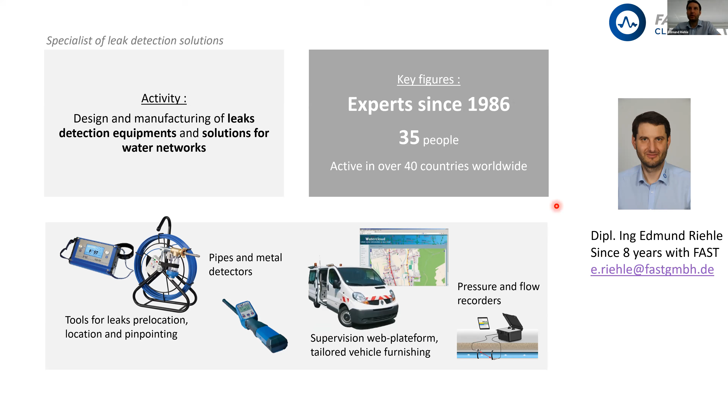We have about 35 people working in our company, and we are active in over 40 countries worldwide. And below here you see some of our tools and products we offer. I will not go into the details here because we want to focus today on tracer gas leak detection.

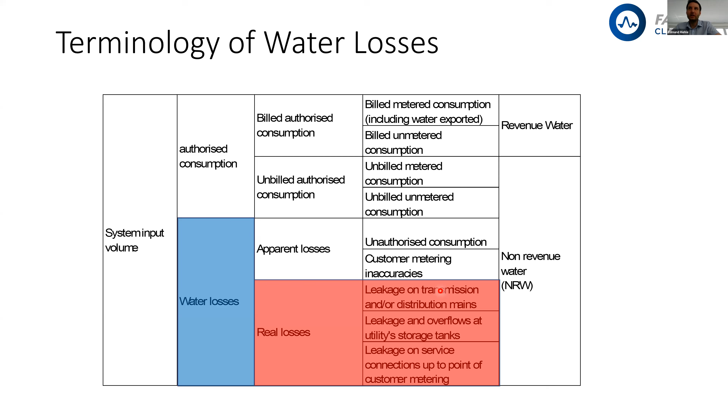Okay, then we also have developed this kind of nice pyramid. We call it the pyramid of success. You see here on the base, you always have some indication that you have a leak in a water network. Then we step up in the pyramid and we do a monitoring of the network through the loud silent noise principle. Then you already know a location or a section of a pipeline which has a leak.

If you don't know where the pipe is, this is usually the next step: before you start pinpointing and really locating the leak, you need to know where the pipe is going. So we can also do pipe and object locating with our solutions. And then we do pre-location, either with noise loggers, like with the loud noise silent principle. We also provide correlators. This is kind of already one of the last steps, but we took it out of the pinpointing mode because it has a very sophisticated background and is a technology which needs special skills as well.

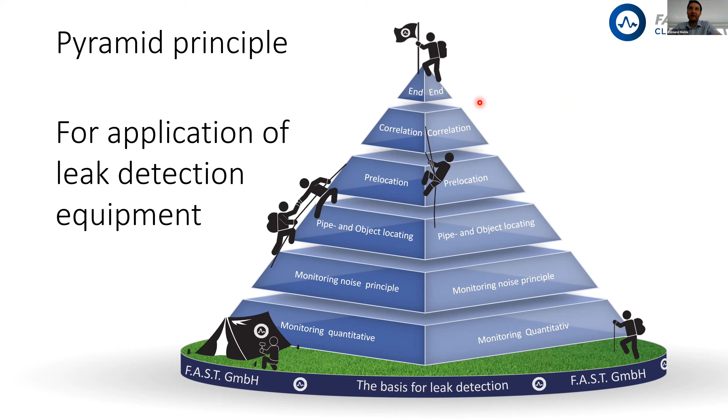For the pipe searching step, we provide PWG for non-metallic pipes, but also metallic pipes. We use a pipe mic for inserting to trace the pipe as well, flexi trace kind of. We do object locating with a metal detector. All this is in the step of pipe searching. For pre-locating, we also do listening sticks, either manually acoustic or electronically amplified. Manual is also acoustic, but the others are all electronically amplified signals, so it's easier for the operator to hear.

For correlators, we provide either stationary ones built inside cars or mobile ones to take out to the field, only hanging around your neck. And for pinpointing, we have solutions with geophones, which is the most common one. Then we also have the pipe mic, which is a unique solution developed by our company and by me actually. And last but not least, as the last resort, we use tracer gas for pinpointing leaks in the water network. And this is my presentation today.

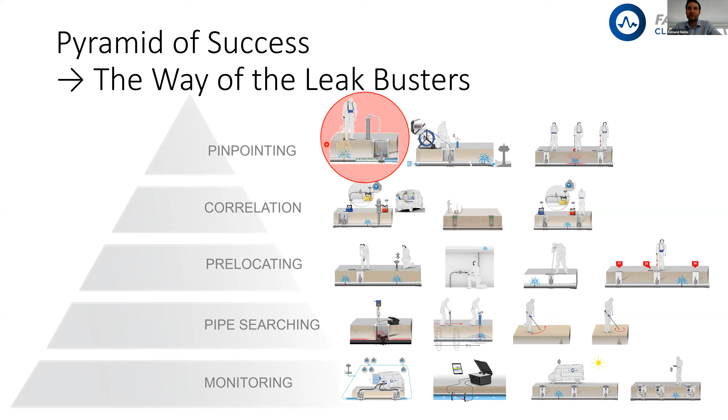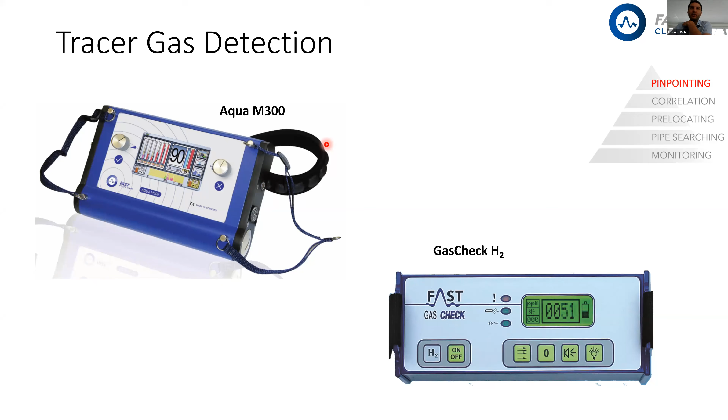I want to show you the application of tracer gas, what you need to be aware of, so the limits and borders of this technology. Okay, for the solutions we have for tracer gas, we use our Aqua M300 or the gas check, which are only hydrogen-sensitive sensors. So we cannot detect helium or other gases. I will explain why we only use hydrogen for tracer gas leak detection later on. Okay, when to use tracer gas, important.

So we say it's a solution of the last resort if all other technologies fail. We have at least some other technology which still can pinpoint your leakage. And one of the main factors is always the ambient noise, especially in large cities where you have 24 hours traffic, pumps running, air conditioners, and so on. So these noises are always louder than the leak sound, and you cannot detect or pinpoint the leak by the acoustic principle. And therefore, tracer gas is here one of the last.

I say one of the last because pipe mic could be also a solution in this situation. But tracer gas was, before the pipe mic was developed, the last resort for very noisy environments to pinpoint, not detect, but pinpoint the leakage.

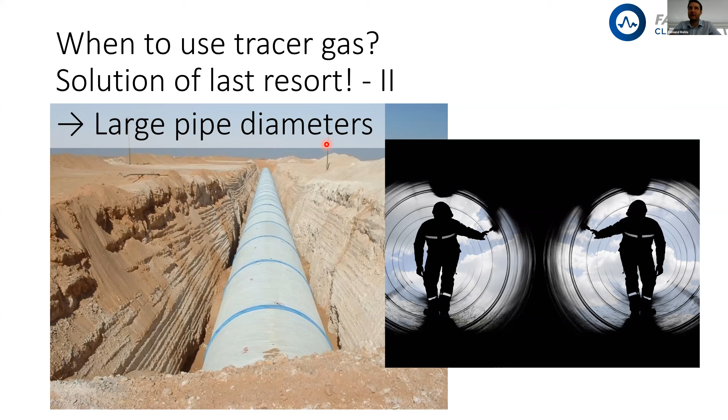And another example is pipes in very large diameters. You probably have heard, if you followed the webinar series of the IWA and also our series of webinars, that the larger the pipe, the poorer the leak sound gets propagated through the pipe material. So either you use specially designed hydrophones for correlating such leaks, or you use tracer gas, especially in very large pipes. This is very poor for the leak sound propagation, and even hydrophones cannot pick up the sound there. And then tracer gas is one of the last technologies besides pipe mic to pinpoint this leakage there.

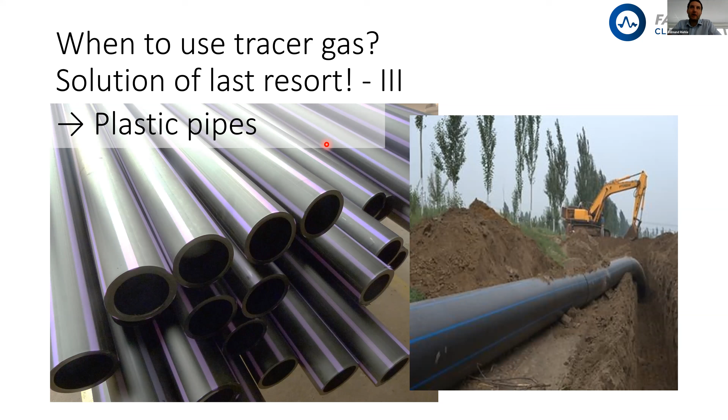Then also, you know, the problem of plastic pipes. They also are very poor in propagating the leak sound to the next accessible point of the network. So usually you also don't hear anything there. No signal for correlating, no signal for maybe ground microphone, and if you don't have an area where the leak might be, it's very hard to go with the ground microphone for a very long distance and listen for the underground leak sound. Therefore, in plastic pipe, tracer gas technology is used widely for the pinpointing of the leaks.

Yes, also if you have very few access points of your network, too far apart that you can correlate on that pipeline, it's a last resort step to also use the tracer gas there, because if there is no signal, you will always be not able to correlate on such sections which have very long distance in between. I say here more than 1,000 meters, but of course it can be also a little bit less. It always depends on the situation.

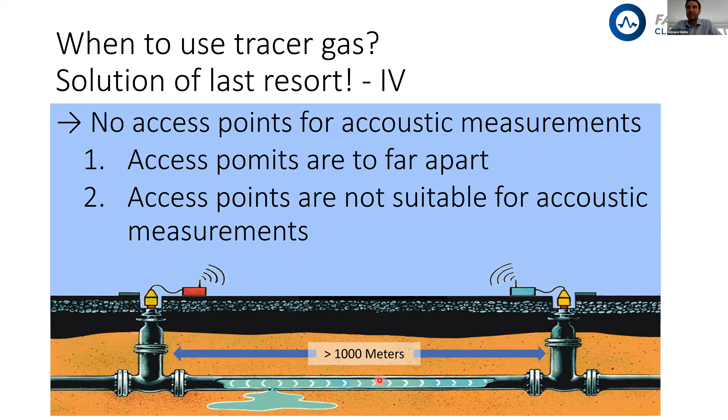As most of you probably already have some background in leak detection, this is something I have to say here. Every leak is different. So we cannot compare one situation with another. Therefore, each leak needs some special thoughts, some special approach to detect. So if one technology and solution was successful within your network, it doesn't mean at the next leak it will be the same and very easy. Leak detection is always a learning process, and therefore we also have such a wide variety of technologies to cover all these demands and even pinpoint the leaks within the hardest environments and conditions of the pipelines.

Okay, then also tracer gas or other technologies rather than ground microphone and correlators can or should get used if you don't know the material of your pipeline, or maybe there was even some repair done already and you cut out a section of the pipeline and substituted it with another material. So this will give you already a big failure if you correlate this section.

You see here a steel pipe, which has a sound velocity of 1,300 meters per second, and you cut out a section of 2 meters and substitute it with a PVC material, which is very common nowadays. I see that very often. But this section only has a sound velocity of 350 meters per second. So in reality, the leak would be at 25 meters, but with this section in between, the correlator will show you the leak at 30.4 meters because of the difference of the sound velocity.

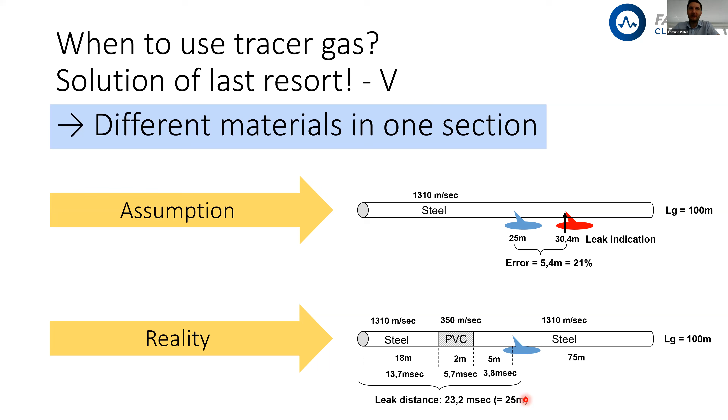And if no one noted in your GIS map that a section was already cut out and replaced, then you won't have this information when you do the correlation. And therefore, you might get misled when you dig where the correlator shows you a very nice peak. So this is very important information, especially for correlation. But this is another topic, and I think one of my previous presenters in the IWA webinars already talked about that.

Of course, also if you have unknown pipe material, if you don't know at all what material is buried, maybe very old maps, or some bad construction and reporting of what they have been doing there, which is also in reality often the case. Even in Germany, we have quite good water infrastructure, but a lot of municipalities don't know exactly what material is buried, and they don't record what they have been doing in their network, especially repairs. So this is also the last resort with tracer gas or pipe mic, besides then really pinpointing the leakage in this kind of conditions.

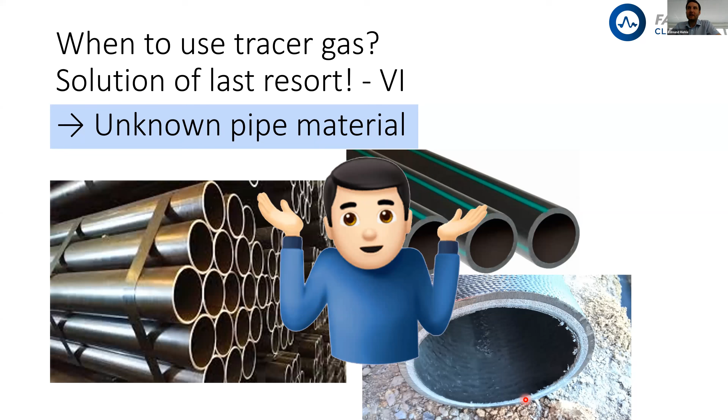Okay, now I want to talk about the tracer gas itself, why we use hydrogen rather than other gases for this kind of application. First of all, hydrogen is the cheapest option on the market. It's the smallest molecule as well, so it diffuses eventually through all kinds of materials, even very solid surfaces like concrete or asphalt will be penetrated by the gas and will come up. So it's also an advantage. And compared to helium, as we've shown here, it is very cheap.

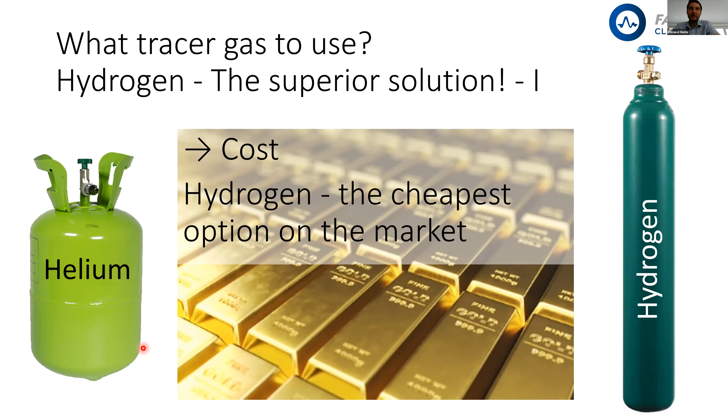Helium is also, besides being expensive, maybe not everywhere available, but forming gas, which we usually use for the hydrogen gas, is widely and broadly available worldwide for welding. It's a shielding gas, so we use a mixture of 95% nitrogen and only 5% hydrogen, not pure hydrogen. This is dangerous and very bad if you would use that in your water network. So always make sure that you use a lower than 5% mixture, otherwise you might harm yourself or others if you use pure hydrogen. The forming gas is widely available, as I said, it's used for welding.

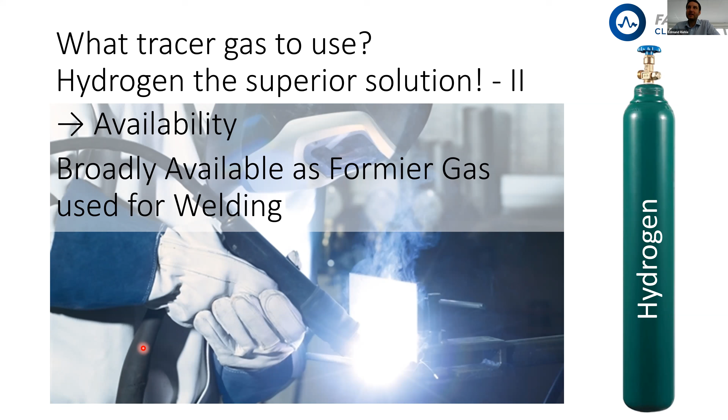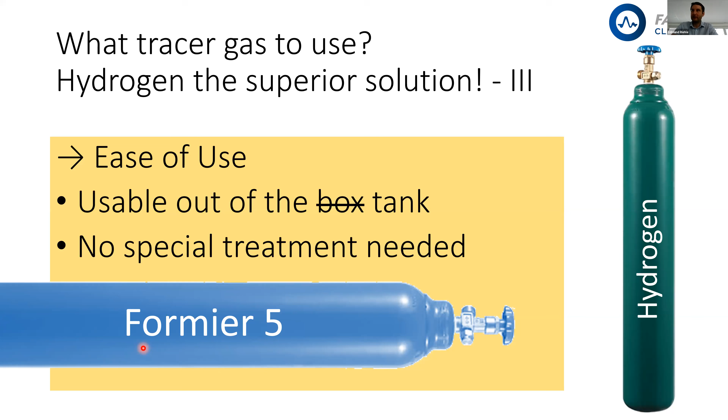So hydrogen is the superior solution compared to helium or other gases, as I already talked about. But we also don't need to do any special treatment. We can directly use the gas out of the bottle, out of the tank, and introduce that into the pipeline. It's pretty easy to use and apply for this kind of pinpointing step.

Another advantage of hydrogen is that there is no background concentration, or very little background concentration, so low that it's not detectable. I have to say, old diesel engines, for example, also emit hydrogen when they drive by, but this is like a small cloud usually, and it diffuses really quickly. So if you detect leaks on a road where you have diesel engines driving by, don't get misled by a small cloud of hydrogen exhausted by a diesel engine, but stick there and try to continue the measurement and verify that this position was really a high concentration caused by the leak below, and the tracer gas you introduced escaping through the leak. Usually you then have a concentration which builds up, and therefore this concentration should be there for a long period, not only like a few seconds, which would happen if a diesel engine drives by.

For example, helium has a higher background concentration, which is detectable. So therefore, it's also not the superior solution or gas to use for tracer gas.

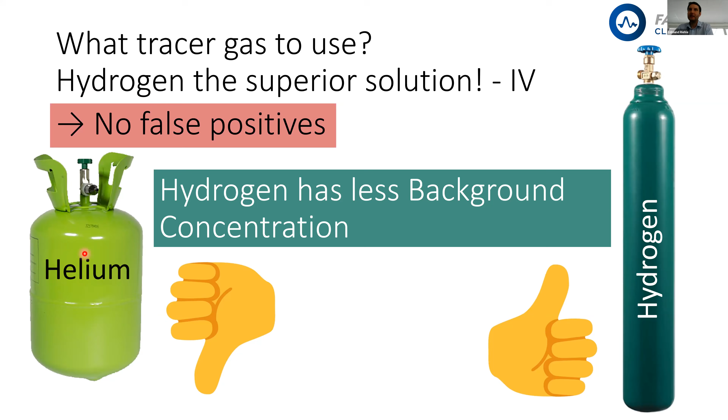Another advantage, as I said, is it's the smallest molecule. It diffuses eventually through all kinds of materials, so it comes up through the ground very quickly. So you don't need to wait as long as you would need to wait with helium to come up, and it also doesn't build up very high concentrations in an area.

Pinpointing, as the name already says, is that you pin out the exact location. And if you have, for example, helium tracer gas, and you leave it - usually what is very common with helium tracer gas is you introduce it into the pipeline and you wait, maybe you even come the next day and then detect the leaks. But if you have large leaks in the area, the gas accumulates at this position, and in the end you have a huge cloud of helium gas in this area, and it's not possible to really pinpoint the location anymore, but you will have high concentration in a wide area, so you are not really much further than pre-locating.

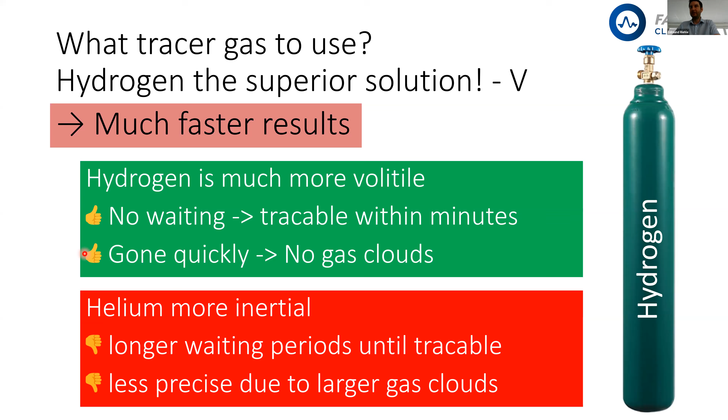I also talked about the dangerousness of hydrogen, which always comes up if we talk about hydrogen. So therefore, we use this mixture. This is very important, and I have to make sure always, if a customer calls me about what gas they should use, that they use this mixture.

If you use a higher mixture than 5% hydrogen with 95% nitrogen, it will be flammable, it will be dangerous, it might be explosive if it accumulates. But if you use lower than 5%, this is the boundary where the gas is flammable, it's completely unharmful below that. It's not flammable, it's non-explosive.

So don't worry with this mixture, but you need to make sure that your gas supplier provides you with the right mixture. Usually here in Germany, we have different colors of the caps which indicate the mixture, and also when they deliver it, it's written on the sheet. Make sure you get the right gas, and don't use gas which is 10% or even higher concentration of hydrogen. It will be dangerous.

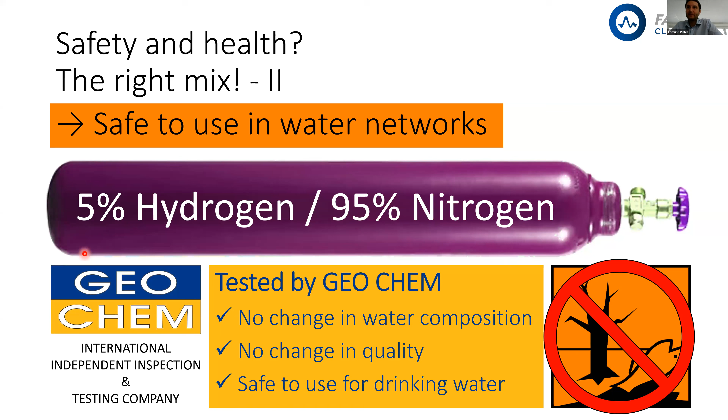And like I said, it's one of the last resorts to pinpoint leakages. Also for using it in the field, it's safe if you use the right mixture. It's also non-toxic. Nitrogen is at 78% background concentration in our air, so you won't get any harm if you inhale this gas or if you have it inside a pit. So it's not dangerous.

Okay, now about some standard application of the gas, which is important, and the slides you're probably most interested in.

We use the tracer gas with a very high success rate in empty pipes. Usually what we do, if the pipe is operated, we sectionize the section where we want to detect the leaks. Then we evacuate the water, discharge all the water, and then we introduce the tracer gas. This is suitable for all kinds of diameters.

The positive effects are we have a very high success rate, and it's suitable for all diameters. But the disadvantage of empty pipes, especially with large diameters, is we need to use a large amount of gas to find the leaks, or to make sure the gas escapes through the leaks and comes up to the surface.

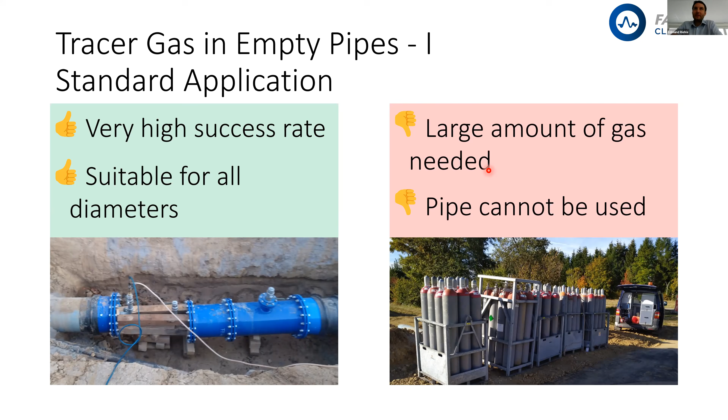And traceable on the surface. Another disadvantage is that the pipe cannot be used for operation, so you need to sectionize and interrupt the supply on this section. If it's not a redundant supply network, this is sometimes impossible, and therefore we need another approach I will introduce later on.

This is a formula for you to calculate the estimated amount of gas you need to apply in empty pipes. I've also written here some common diameters with the amount of gas per meter at 1 bar of pressure. You see here already with the DN 500, you need to use already 200 liters of gas to achieve a 1 bar pressure inside.

We always say, especially with plastic pipes, that you should use at least the water pressure normally present in this section of the pipeline, to make sure the gas really escapes through the leak spot. If the pressure is lower than the normal water pressure, what might happen, especially with plastic pipes, is that they don't create holes, they create rather cracks. And if the pressure is lower than the water pressure, the leak might be closed, so there is no apparent leak.

When it reaches the water pressure or higher, the leak opens up and the water or the gas escapes. So it's very important to know that you should always apply at least the water pressure. In pipelines still under operation, we say apply at least 0.1 to 0.2 bars more than the actual water pressure.

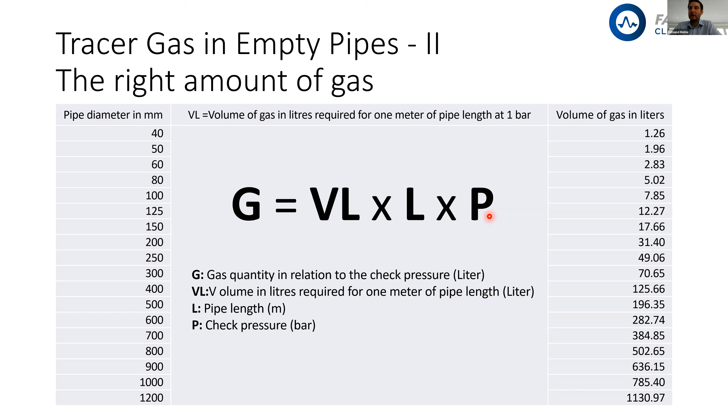Now I want to introduce a new approach and a better approach for tracer gas leak detection. We now call it an add-on technology to the tracer gas detectors. We call it gas diffusers. Formerly, we called it bubble creator, but gas diffusers sounds more sophisticated, I think.

With the gas diffuser, we have a tool to diffuse the gas inside the water and create very small bubbles. The small bubbles will travel together with the flow inside the section of the pipeline you want to detect the leaks, pinpoint the leaks, and escape even on leaks on the bottom or on the side, not only on the top. If you don't use a bubble creator or a gas diffuser...

It's pretty easy to imagine that you rather create big bubbles, and the big bubbles always stick on the top of the pipeline. If you're lucky and the flow is high enough, they also travel with the flow and will escape through the leaks on the top of the pipeline, and then you can also detect them. But not all the leaks are on the top, as you know. Most of the leaks actually are on the bottom or on some joints or gaskets.

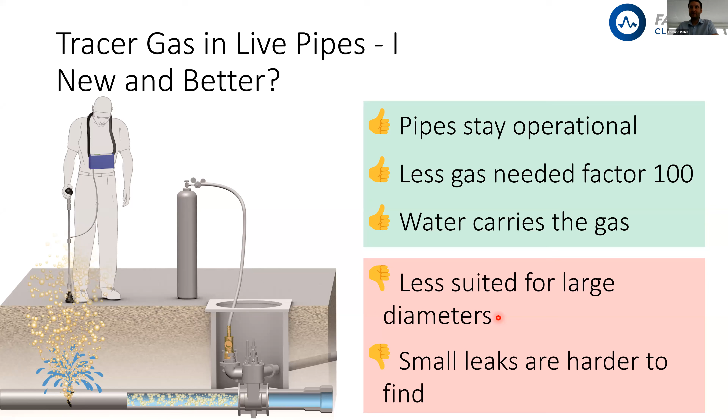Okay, to go a little bit into the tool and show you what we have developed. This is the gas diffuser, what you see here in the picture. It is built in a way so that it's a very tiny stainless steel meshed filter.

You may know the application of gas diffusers for aquariums, to make sure fish have enough gas to breathe in the water. This kind of sponge gets used here too, just much more tiny - the pores have only 10 microns. In this video you see how small, tiny bubbles get created. This is excellent to mix the water with the gas and create these small bubbles, which flow with the water flow, and the probability is much higher that these tiny bubbles escape through leaks rather than if you wouldn't use this gas diffuser.

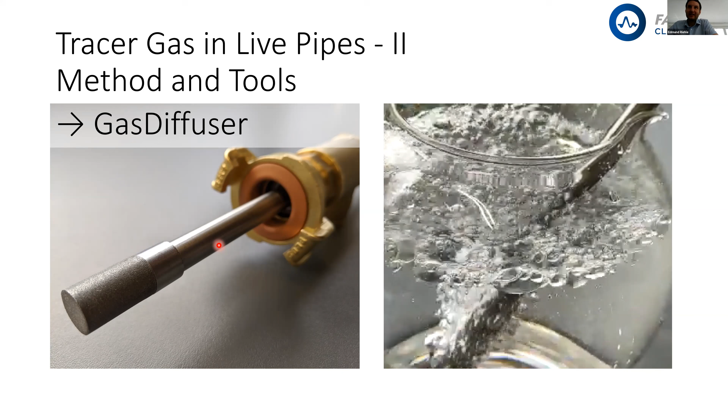Here's another example of the application, in a training area in Iceland - a football/soccer field where they actually heat the grass to make it grow. There we also introduced the gas where the pipeline was not possible to discharge. In this small video you see how the tiny bubbles come up - it really looks like sparkling water, and it's possible to detect the leaks here as well.

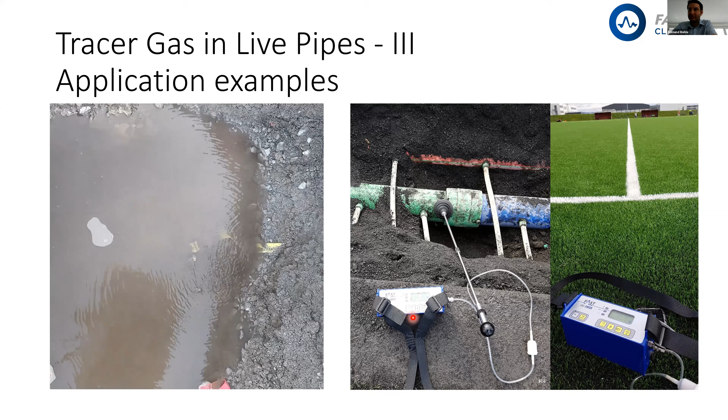Okay, this is about the tracer gas in water pipelines or pressurized infrastructure pipelines. But we also have some applications outside the range of this.

Also with flat roofs, often when they leak, you can introduce the tracer gas into the room below. You won't be able to increase much pressure, but if you're able to step on the flat roof, which is usually the case, you can fill the room where water is ingressing with the tracer gas, then go up to the roof and try to find the spot with small cracks where the water can enter.

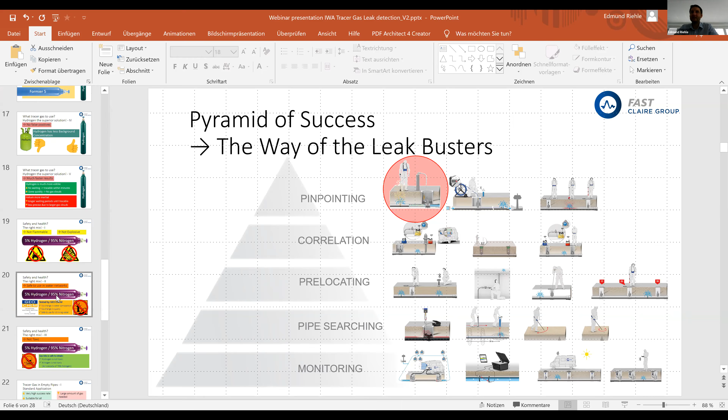Okay, we've got a question from Brill, which is, will it affect the pH level of the water? And there's another question straight after from Syed: will it affect any water quality parameters in the water? So I guess an answer for both of those. Yeah. No, I spoke about that in my presentation. I will go to the slide where I talked about that. So we have tested with GeoChem. It was a project which we had in the Middle East, in Dubai.

And DEWA, the water authority in Dubai, asked us to provide a certificate that the gas is absolutely safe. So we did that, and also since it is recognized by the IWA and even the DVGW, which is the German regulation for the water authority and the gas industry here in Germany, they also testified and said it's absolutely unharmful. It doesn't change any water properties physically and chemically. So no pH is changed, and the water quality stays the same.

Okay. We have another question from Stephen, and I think this comes back to one of your slides when you were mentioning that small leaks are difficult to detect. He asks, how small is a small leak? And the second part of his question is, would this be feasible for pipeline pressure below 1 bar? Yes, for pipeline pressure below 1 bar, tracer gas is absolutely the last resort. Also with pipelines with interrupted water supply, this is the last resort, because you won't be able to use any acoustic technology to detect the leaks. Therefore, tracer gas is the last resort in these cases.